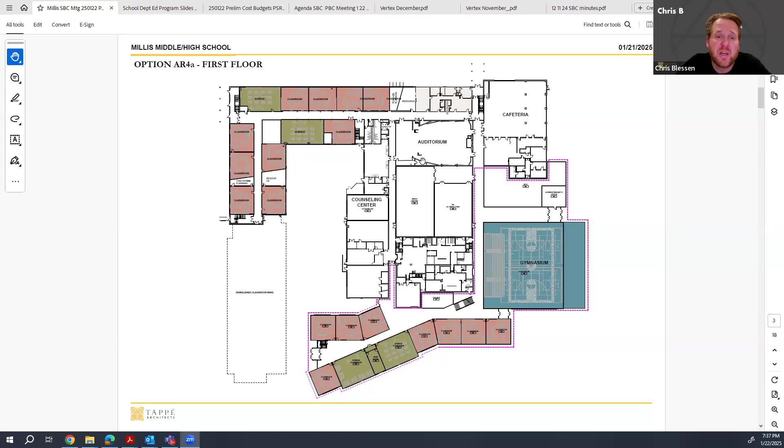Included in the addition is a new gymnasium, and that move allows us to open up the existing space within the existing gym and make that a couple of different components, which is a media center and also some PE alternatives, which are identified in the educational space program and the educational program as well. But all of those moves allow us to meet the ed plan and ed program.

You can see that there's a number of classrooms scattered throughout. There's the science rooms that are the right size in the green color. And then various support spaces like the teacher planning and resource rooms and other small group rooms throughout the building.

The counseling center would actually be located on top, so the existing boiler room is a two-story space because you enter in and go downwards, but it's got the same ceiling height or roof height as the rest of the building.

With the modern way we do all the boiler capacity and energy stuff, we can actually get room back by infilling that floor and making it a counseling center. That's a neat addition to the building, getting counseling separate from admin but in a central location that can serve both schools, middle school and high school. So that's the first floor.

Jeff, if you want to go to the second floor. This floor shows a similar floor plate because they stack really well, so it's very simple to understand the building diagram. A couple of these spaces, just to mention, you'll see some diagonal walls within the floor plate. We're showing those to meet program size and components identified in the space program.

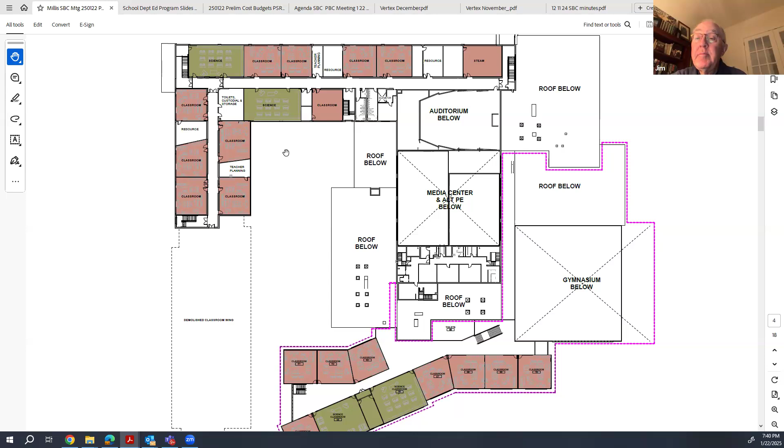Can you just point out the handicap accessibility features? We would have one elevator in the existing portion of the building, and the new addition portion would also need an elevator over there to support that space.

Hang on, I'm going to get my dog. One second, no intention of bothering your dog, that was not the point. Sorry about that, when you get a puppy for Christmas you run into problems sometimes.

So yeah, the handicap accessibility issues - we would accommodate that in all of the door openings. When you do the renovation portion, the door openings would accommodate that, and the elevator accommodates that. The new addition would also comply because that's just how we would build it. Everything's level on the first floor, so there's no floor changes, it would just be a flat transition from the existing to the new addition part. On the second floor, the two second floors don't actually connect between the addition and the renovation portion because there's just not a good way to make that connection. So those are two separate second floors there.

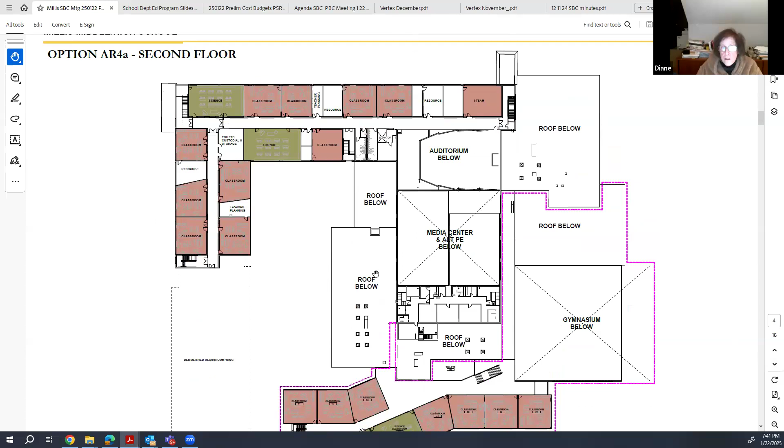Thank you. Chris, could I ask you a couple questions? Yes ma'am. Will the demolished classroom space be used as swing space? Well, not technically - the swing space would be the first phase of this building, which is the actual addition. Whatever you call this addition to the south, we would build that first, which allows us to move students. I'd suggest moving some students over, then doing the renovation portion, and then demolishing at the end, because that allows you to stay flexible without having to add modulars.

To Diane's point, this allows us to do that. There are more spaces to be renovated than fit in this existing wing. But there's a potential that once the new addition comes online, we move into it, keep this space alive, and then start to renovate. We're kind of decanting space into the addition once that's going. So as Chris noted, we take the addition over, keep that live, renovate this portion, and then demolish it at the very end. So it acts like swing space, but it's really the addition that is the swing space in this option.

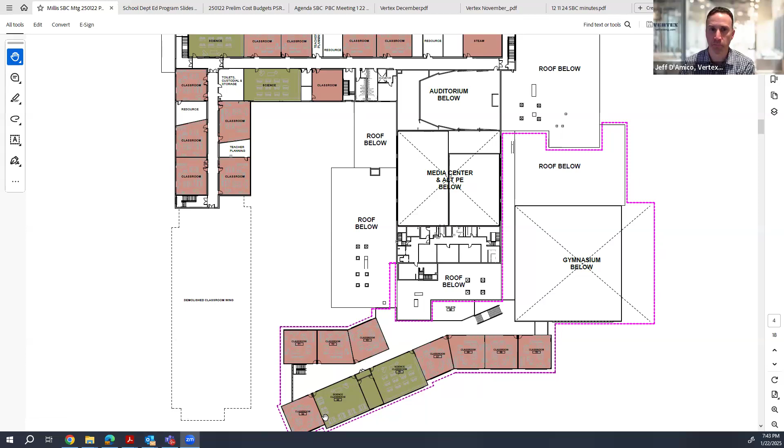One other question - can you point out on the first floor where the entrances and exits are? So we're proposing a major entrance - the site plan actually has a drop off over where the demolished classroom building is, which would be a nice central way to come in. You have an entry to the north to the existing building that's being renovated, and then you have an entry for the... let me see if I can do some markups here.

So you have an entry right here and an entry right here, and your drop off is coming in like this, creating a nice central pathway for students to come into the building to their designated grade level house. And those are the entries, but you still have a public entry down here.

Visitors that need to access the building during the day would be checked in at the main office. The parking lot is down in this zone, and you still have two entries that can access this portion of the building for big events in the gym or auditorium. So you have different ways to get in for public versus school on the left side.

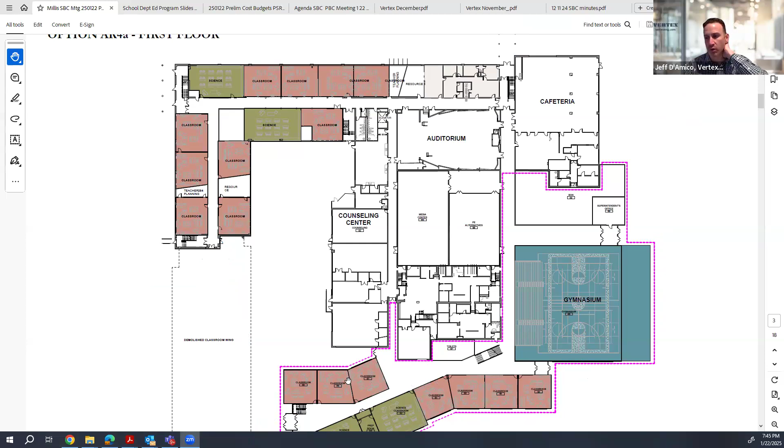Thank you. Chris, I know we're at the conceptual level, but where would you have the administration? It's not really called out in this option, but in the middle school wing or the addition wing, would that be central in the middle here? I'd want to get the administrators some natural light, so we've got to work that out. We've got the square footage in here, but probably what'll happen is we'll squeeze things around and get offices with windows in various places.

You'll have basically that suite that's up on the second floor right now for the middle school, or if we've been talking about the middle school going here, we would go through the space program, do the final programming meetings and schematic design, and really plan out where that wants to be. If it wants to be on this edge, or maybe it's tucked over here and we move the gymnasium up a little bit. We've got some flexibility there.

Oh, and by the way, there's a superintendent's office and back of house over here in the addition. So this is another public entry for anybody needing to go to the superintendent's office, a dedicated place for that interaction. So I think we've got some flexibility on figuring that out. I don't have it sorted at this moment.

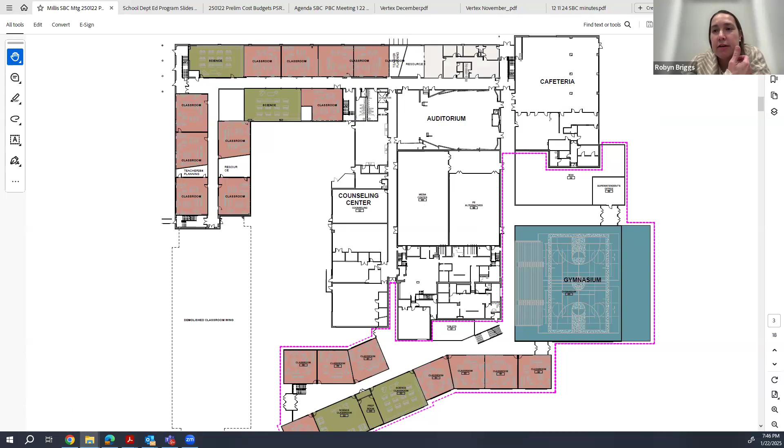I have a question about the drop off thing you just shared. I was wondering if you thought it would bottleneck having both schools use the same drop off parking, or be a traffic issue. That curve is on the bottom there and they enter left and right, so I'm wondering about parent drop off and it being crazy with two schools' people dropping off at the same time frame.

We don't anticipate that to be a problem. We've had the traffic engineer look at this. When we get into schematic design, they actually do what's called a traffic impact study, a TIS report, where we can get more into the weeds of how buses interact with cars and all of that.

Is the bus also dropping off at the same place too? Well, we've got a couple of options. One, I think you can separate buses by having the buses parked on the road between Clyde Brown and this, or have parents come in from... Chris, do you have the site plan handy?

I was going to look that up, Robyn. We looked at a couple of options. One was keeping the drop off existing as Chris just started to draw, between Clyde Brown and the high school entrance. We actually carved out a drop off lane, I think that was for buses in an earlier scheme. Okay, sorry, I'm new here. No, it's okay, this is the point where we talk about all that, right? It's relevant. Yeah, we just want to make sure.

I'll also say that a lot of the high school kids take their own vehicles, so there's still that parking area in front, correct, so those kids would be accessing the start of the day from some of those other doors.

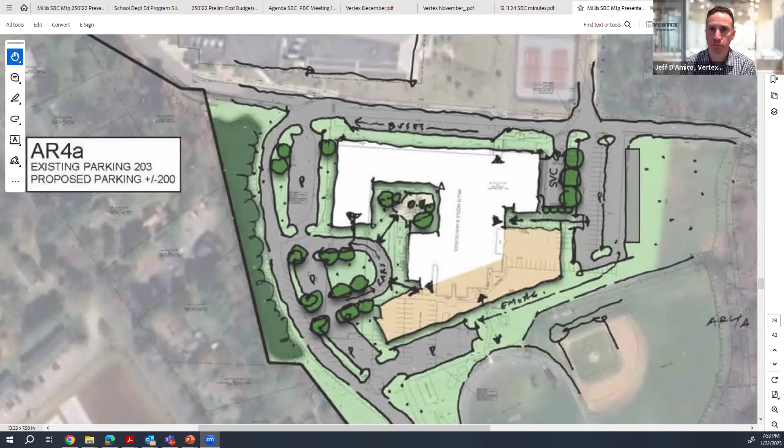Thanks. Again, as like a teacher, if I'm going to park in that lower parking lot down there, I'm gonna get stuck in that parent circle traffic trying to get in and park down there. That's just my thought. We'll address that when if this goes down the road. Yeah, parking and traffic is a real issue at every single school project.

100%, 100%. It'll never be perfect. None of us here are going to promise that, because you're penned in with all the existing features of the site, right? Between Clyde Brown, the property lines, the athletic field, and the brook. So we're going to come up with a concept that works, right? But yeah, for sure, there'll always be inconvenienced people. And those people will figure out where to park on the days they need to get out early. That's just the reality of working in a school system.

And I'd also say that we don't open our doors till 7:40. So most of the teachers are in at 7:45. The kids start really coming in around 7:50. So we don't have a lot of problems with teachers competing with kids and parents for getting in. Okay.

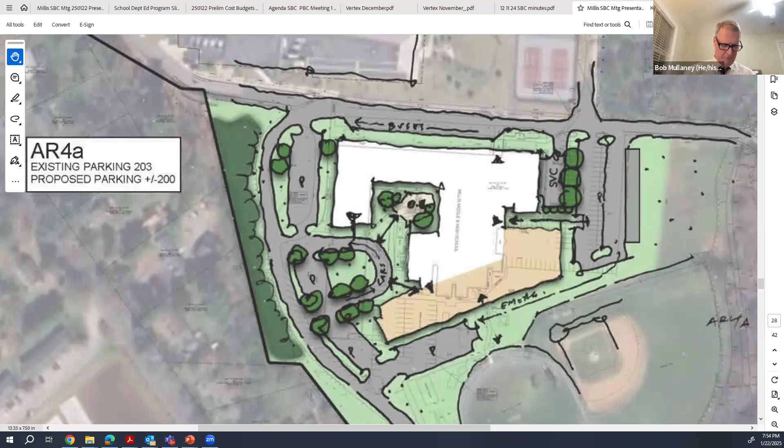All right, I think we pretty much wrapped that up. Was there any other questions from the group? Any questions on design or floor plans?

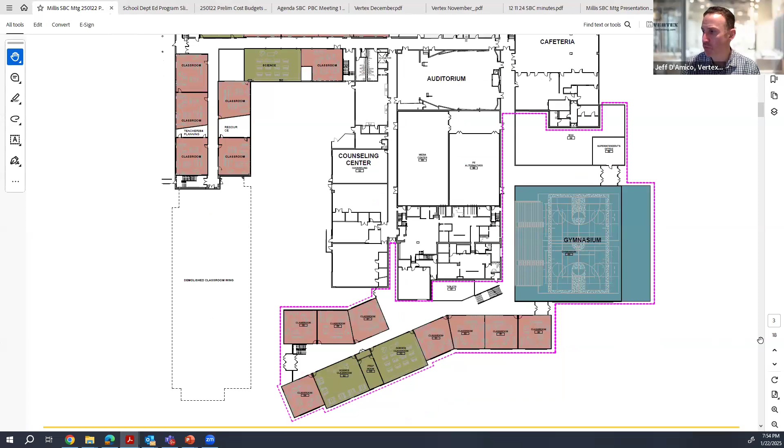When we get to the end of the presentation and start to talk about the deliberation and evaluation, we can bring up the floor plans again and click through them. From there I'm going to take back over, and we can take all the questions you guys want for design in a minute.

I'm going to zoom out for a second so this fits. So these next couple of slides are things I showed to the committee, you know, a year plus ago when you guys hired us, a year and a half ago. It's a little bit about the MSBA's process.

At a high level, there are things that are categorically ineligible, things they deemed ineligible because they exceed the cap or don't fit within their program, and then there are things that are just excluded costs.

So first, categorically ineligible: things they don't participate in are legal fees, offsite improvements, turf fields, stadiums, or amenities, which would apply to the new construction option where you'd knock the building down. Also utility company back charges, swing space and modulars, which apply to all the ad renos or renovations, local permit costs, any bond borrowing or financing costs, site remediation, and asbestos containing floor tiles, although they do participate in most of the abatement and demo of a building.

In your case, you're not really considering an auditorium for the middle school, only in the new construction option, but because it's a middle high, that wouldn't really apply. District administration offices is applicable to every option. So those are some of the areas where they start to carve out square footage.

That list is important because when I get to what the potential rebate reimbursement will be later in tonight's presentation, those are some things floating around in the background as to the why.

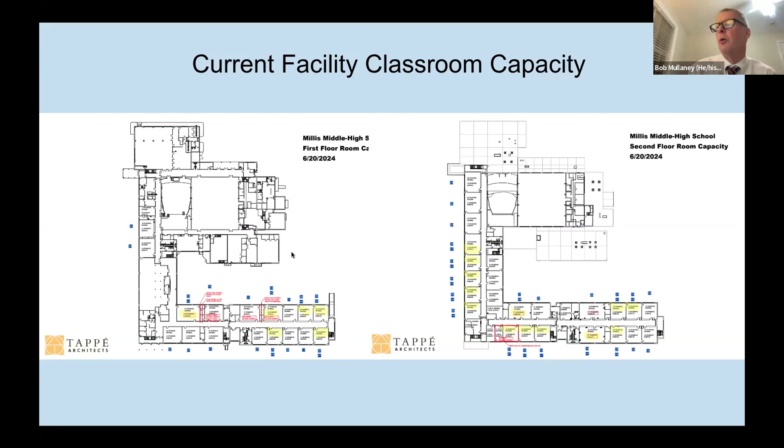So again, R1 is the 10-year capital plan. R2 is the 10-year plan rolled into one project. And R3 is a 10-year plan rolled into one project, resizing some of our science classrooms and replacing the gym bleachers. All those options would definitely address our roof, our electric, our windows, our HVAC, but they do nothing to address those classrooms that are in yellow, and it would do nothing to support our educational plan and the vision and core values of our district. So as a school administration, we couldn't consider any of the renovation options as long-term solutions for our schools.

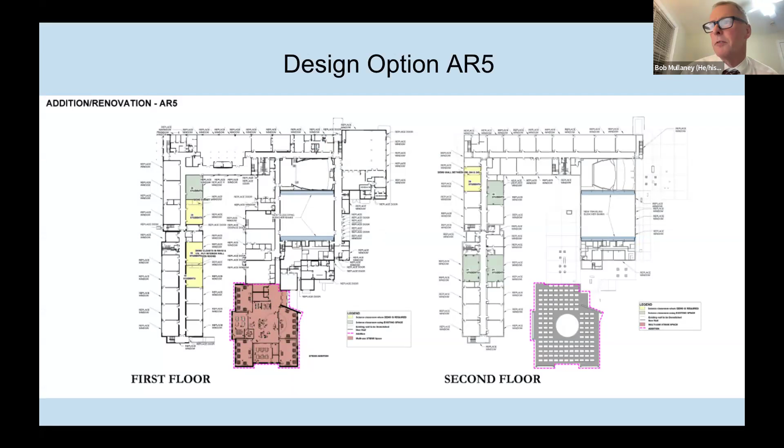So then we looked at the addition renovation options, AR5, AR6, and AR4A. AR5 adds this STEAM wing kind of as an appendage at the end of the music and art wing in the high school now. And we looked at this option and what it would get us in terms of our educational program and what it didn't get us. So what AR5 got us was some of our science classrooms would be increased in size,

again, just kind of cutting out walls from storage areas. It would create that multi-use STEAM wing, and that STEAM wing would have some whole group meeting space that we highlighted in our educational program. And it would have appropriate storage in the classrooms and learning areas. What AR5 wouldn't get us from our ed plan is that it would not create two distinct school areas, a middle school and a high school, and that was an important part of our educational program.

We'd still have those classrooms in yellow that exceeded the MSBA capacity guidelines. It would not create collaborative space in any other area of the building except for that new STEAM wing, and we'd still have the so-called double-loaded corridors. Our special education spaces and our English learner spaces would kind of continue as we have them now, really just finding small spaces and shoehorning classrooms or learning spaces into those areas. It wouldn't upgrade our music or VA space. We'd still have the same problems with the gymnasium - it's not large enough, we'd have no adaptive PE space. And STEAM, as I said earlier, would be almost like an appendage and would kind of be isolated from the rest of the general ed classrooms.

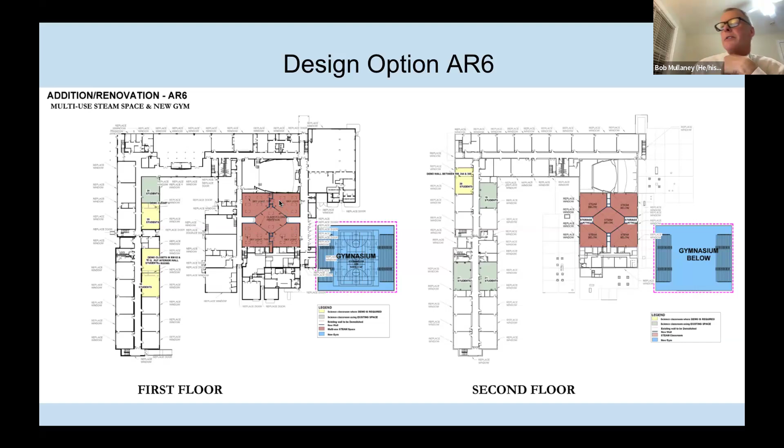So then we go to AR6, and AR6 is the building of a new gymnasium, and then taking the old gymnasium and creating STEAM space there. And what does that get us? Again, that project would also increase the size of some of our science classrooms. We'd get a gymnasium that is appropriate for the classes.

It would also create a gymnasium that had the right sizing so that we could actually host late-round tournament games. Right now, when we have a tournament game beyond the first couple rounds, we have to go to our neighbors at Medway and use their gym or some other gym.

It repurposes the gym as STEAM space, so it gets some new STEAM space with appropriate storage. What it doesn't get us, once again, is still commingling the middle and high school areas, not creating two distinct school areas. Still have the undersized classrooms, still have the double-loaded corridors, still have undersized special ed and English learner spaces, still no upgrades to music and VA, and we'd still have a need for adaptive PE spaces. The plan with the new gym does not include PE spaces.

Once again, under the 150,000 square feet. Classroom sizes, swing space — I hate to call it wasted space, but the former gymnasium is 2 stories. The STEAM wing would be 1 story with a very high ceiling. Doesn't promote those middle school neighborhoods. The student service areas are largely unchanged. Storage is still a problem in most classrooms. And again, we felt that was not a long-term solution.

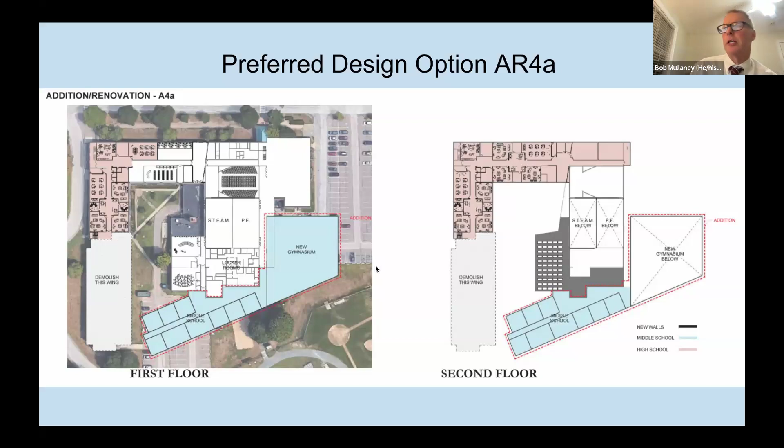It creates 2 distinct schools with the shared common space at the center between the 2 schools. It allows for, in the middle school, the learning neighborhoods. Grade level teams would have all disciplines, special ed, and student support services in proximity. And it would allow some flexibility to promote extended learning spaces. These spaces could be adequately supervised, as you know, an important function of middle school is to help students move towards independence and autonomy.

The special education and English learner spaces wouldn't be carved out places where we just have a little room. They'd be thoughtfully embedded into the learning neighborhoods. The spaces would support creativity and provide quiet spaces for social emotional learning — that's SEL — different areas where kids can deal with and handle the issues that come up during the school day invariably. And the flexible multi-purpose gathering spaces could be used for whole grade meetings, presentations, adaptive PE, and some of the group activities they do at the middle school level.

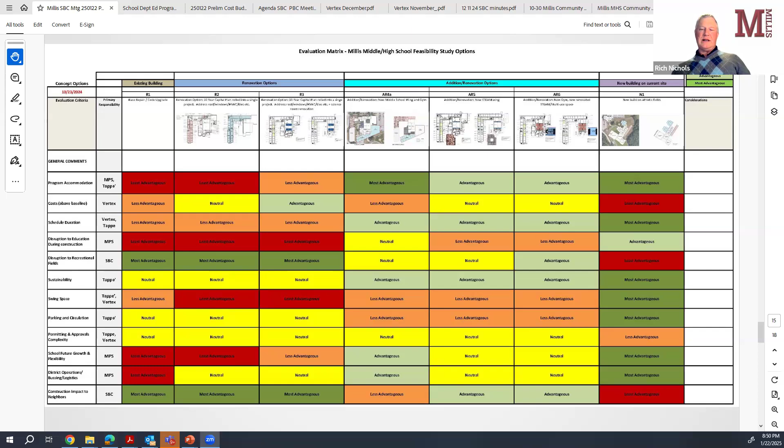Yeah, to John's point, it grades out a little better than the other two add-renos. It's a relative exercise, it could certainly flip to yellow and be more neutral, because you're not paying for the throwaway cost of the modulars. But to Mike's point, I think it was the 3-phase nature of how we moved clockwise around the building, that's why we're thinking that was less advantageous. And again, that's kind of relative also compared against the new option, which is like, hey, build a new building and then there's no swing space. But there is some middle ground there that we could tick up if the committee feels that's a good differentiator. But that's a good point, John.

Thank you. Yeah, thanks, guys. Any other questions, comments on the matrix?